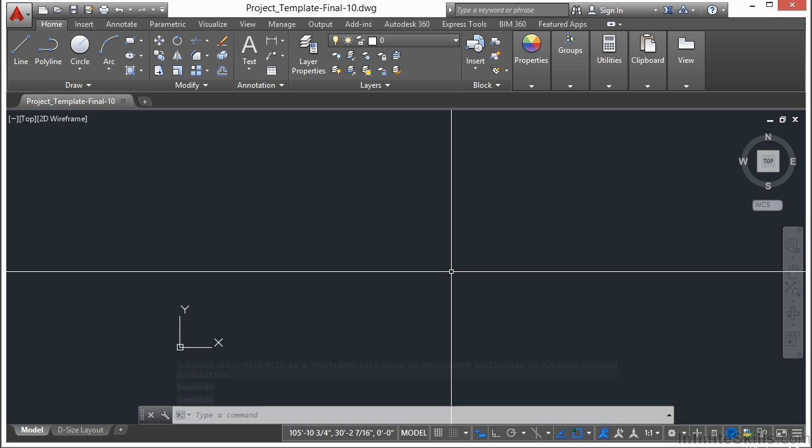We're going to add 2 blocks into the file. So open up your project template file that you created earlier. I create a typical one to start with and then a final version as well so that I have a before and after example file available to you to use. I'm going to save this into my current project folder as the before. So I've saved my file.

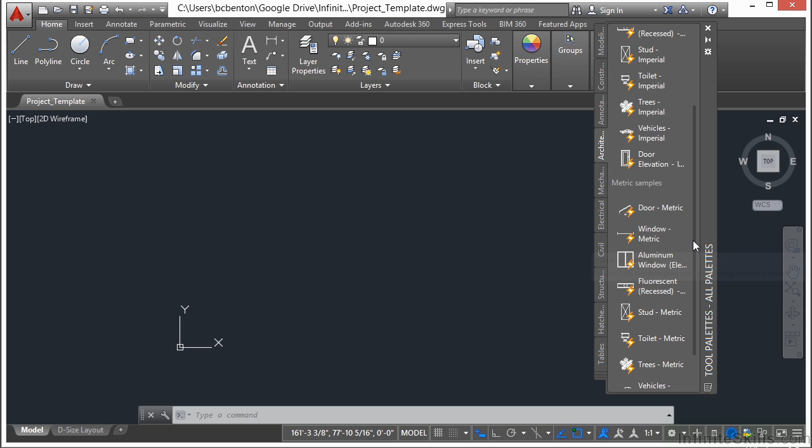Now let's open up the tool palette. Remember to do that, you press Control and 3 at the same time. Let's go to the Architectural tab. Find the window block. It's the window Imperial. They have 2 versions of most of these blocks out of the box, an Imperial version and a metric version. They're exactly the same thing, but one is set up for metric units and the other one is set up in inches. We want the Imperial window version.

Left click on it and insert it. So there's the window. This will insert the block from the tool palette into your file. You can place it anywhere for now. Now let's do the same thing with the door Imperial. Select it and then insert it. And we're going to use these 2 blocks in this file in a later project.

Now the chapter projects are adding all these features, as I said earlier, so make sure you're keeping up with them. We're slowly adding to your skill set and developing a file at the same time for later use. This is the same type of process that you'll use when you create drawings in the real world.

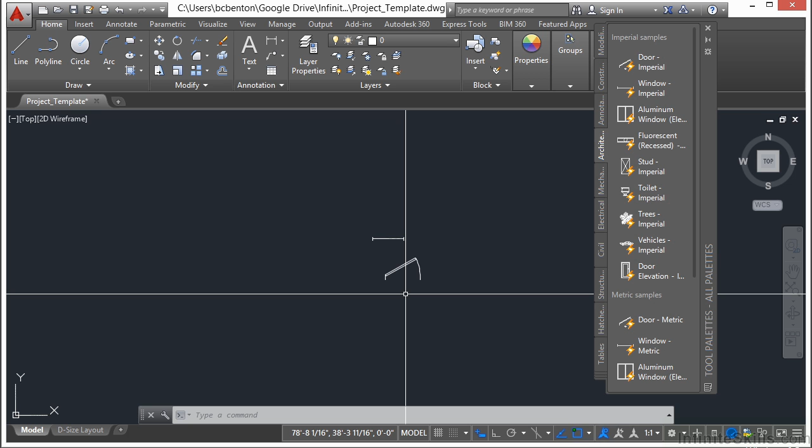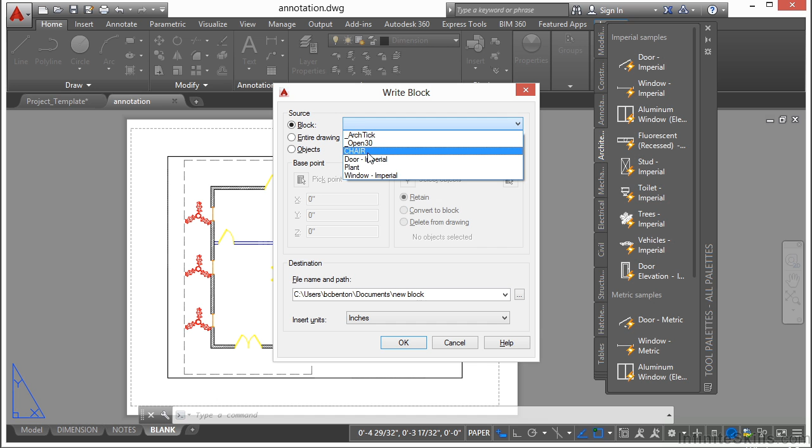Now let's go get the chair that we had worked on in our annotation example file. So go to annotation, click open, and from anywhere in the file, we're going to WBLOCK out our chair. So type in WBLOCK, that means write block, and we're going to select the chair block. So pick the block option, go to chair, and then click here to browse.

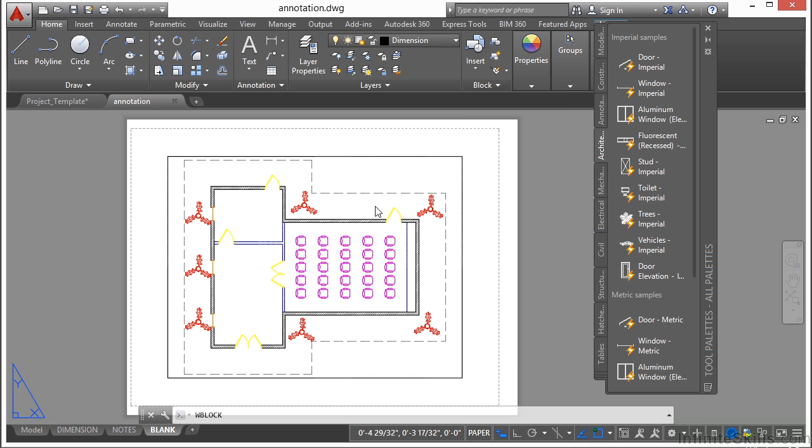Now this is going to save our file where we need it. Let's go to your project files, wherever you've saved them at. And I'm going to overwrite our chair file that we created earlier. Click OK. I'm going to replace it. And so now we've exported our chair block. Let's go back to our project template file. Go to Insert. And now browse to where our chair file is. Open it up. Click OK.

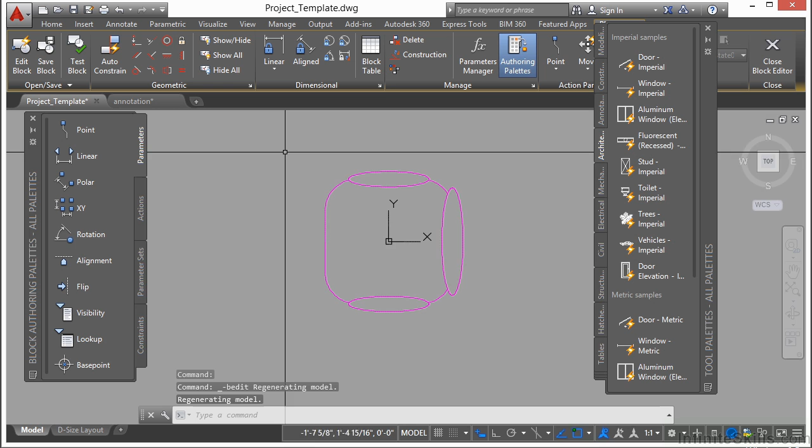And insert it. Now, I don't like the way this chair is because it's not on the right layer. So I'm going to select it, right-click it, go to Block Editor. Very simple. Select all of it. Go to the Home tab. Click on the layers here and click 0. Press the Escape key. I'm going to close my tool palette and I'm going to click on the Close Block Editor, Save Changes. There, now we have the right block in here and it's drawn on the right layers.

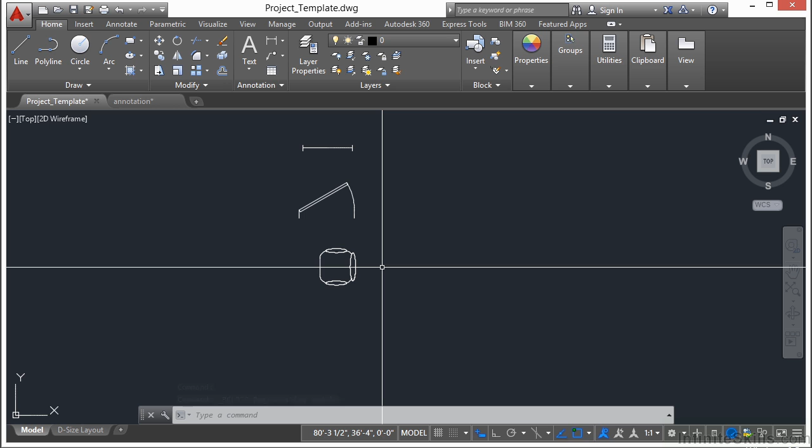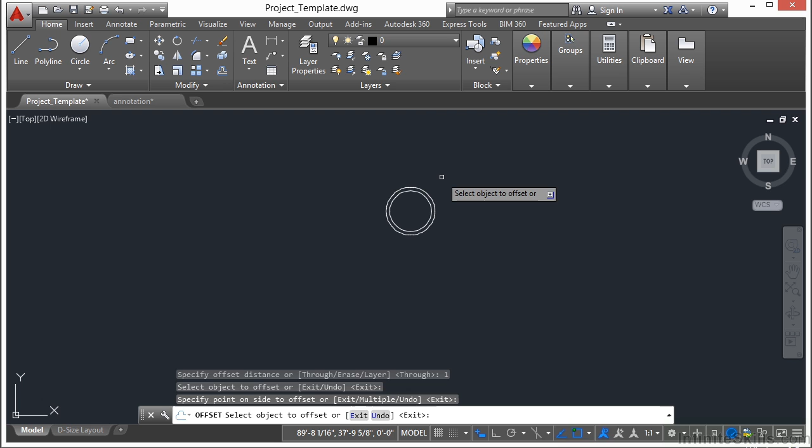Now we need to create a new block, one for our plant. So let's make sure we're on layer 0. And we're going to draw a circle. And you can draw this anywhere. Start the circle command and make the radius 6 inches. Now let's offset it by 1 inch to the outside. Now let's draw a polyline from the center. And you can just draw it straight up. Just draw it out about 12 inches up.

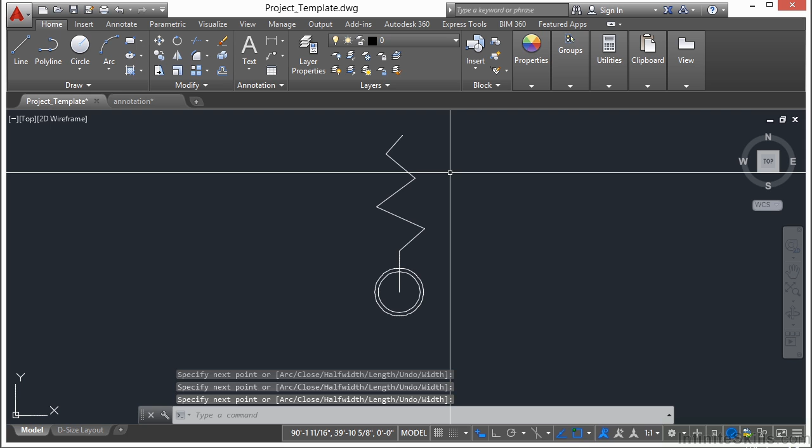I'm going to turn off my ortho now. And what I'm doing is I'm drawing the center of my leaf. Just make it look something like that. Make it squiggle. Now let's offset it again by 1/2 inch, 0.5, to one side and then to the other. Select the center and erase that line. Now that we've offset our center line, let's just make some sort of leafy looking shape.

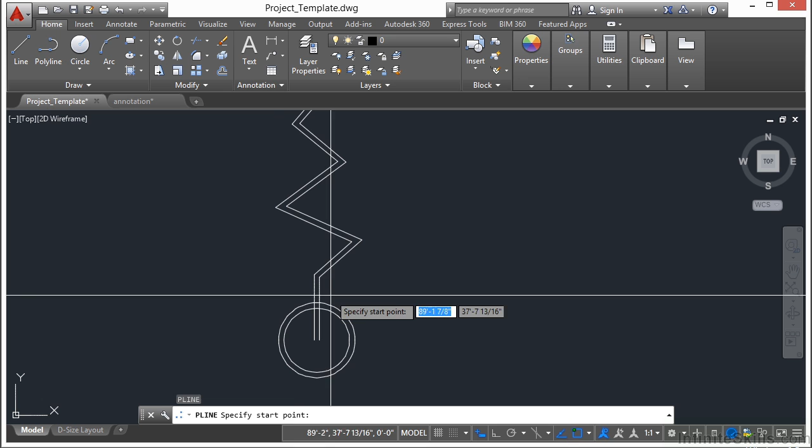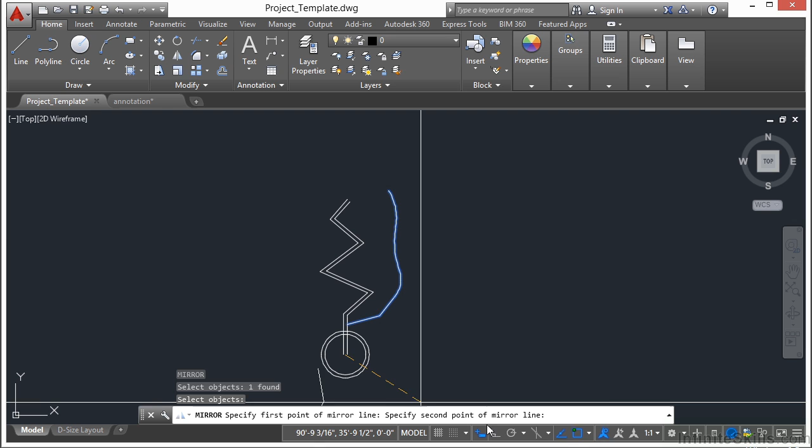I'm going to use a polyline. I'm going to start from here. And I'm going to come out. Put it in arc mode so that it has a little bit of shape to it. I'm going to mirror this about the center line of the circle, turn on my ortho, and then finish it with an arc. Turn off my ortho, just sort of eyeball it. Doesn't have to be perfect. This will get us what we need.

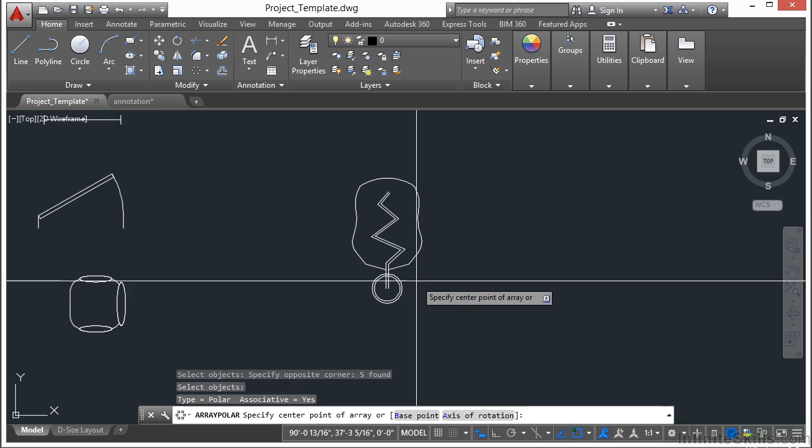Now I'm going to use the array command. I'm going to use a polar array. I'm going to select these objects, press enter, I'm going to array it about the center. And let's change this to 5. Close the array. Now we have a really big plant. Let's make this all into a block now.

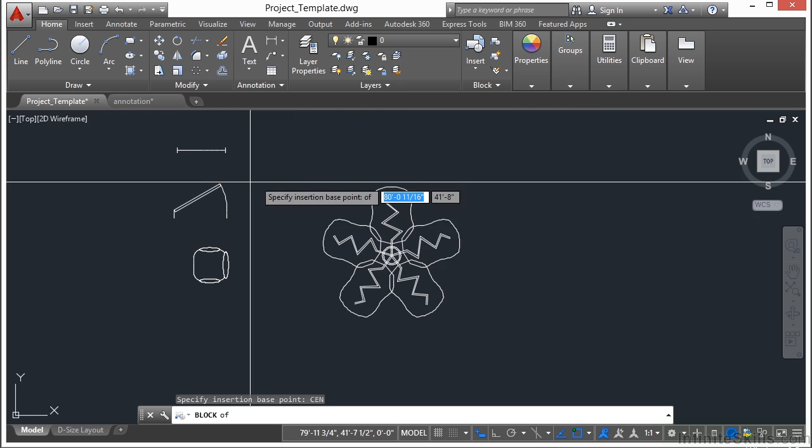So type in the word block, press enter. Let's call this block plant. We need to pick our base point. That's going to be the center of this circle. Now we're going to select the objects. I'm going to pick all of that there. Press enter. There's our preview and OK. There's our block. Let's right click on it.

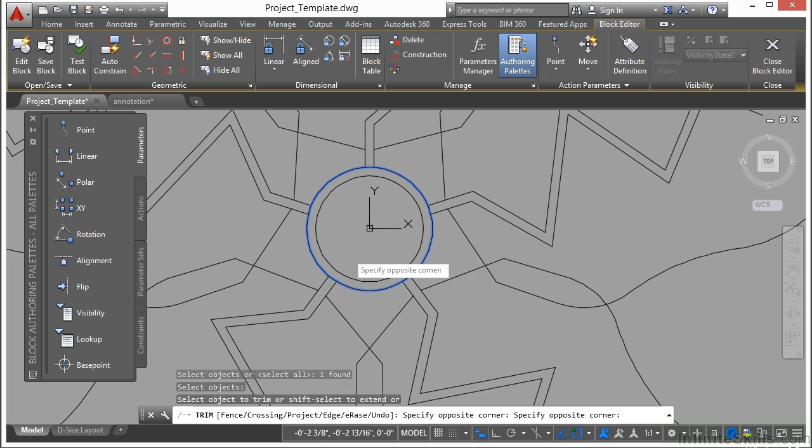Block editor. Let's use the trim command. And let's trim all these lines. I can't trim them because they are an array. So I'm going to explode the array, and now they become regular lines. I'm going to trim them about this circle and clean that up. Close the block editor, save the changes to plant, and there we go. Now our template file has a door, a window, a chair, and a plant that we're going to be able to use later on.